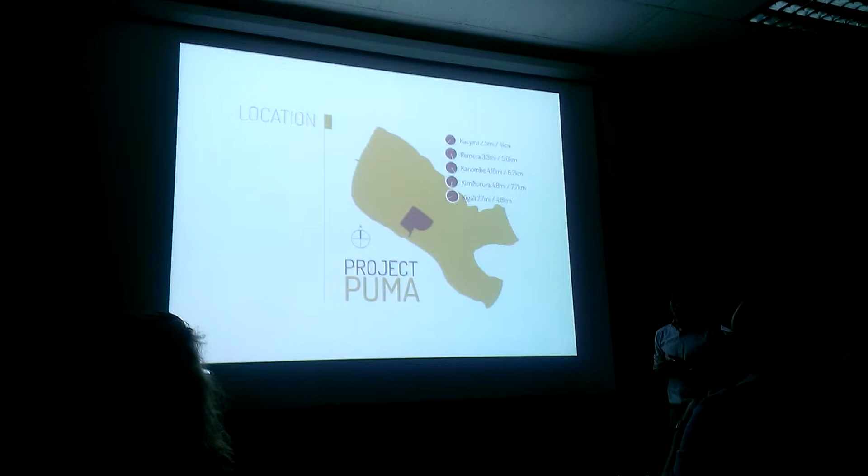They are all walkable distances, 4.8 to the capital—I think I mixed up miles and kilometers there—but they are all very walkable distances, not very far from the city center. So it's actually a pretty good strategic location for a project like this to take place.

Okay, so to our concept, we are focusing on three major themes: the first being movement of the people, the second being economic sustenance, and the third being faith. All these three themes aim to promote human flourishing in Rwanda.

And because of its history, Rwanda is actually one of the top innovators in agricultural production. One other thing we observed is that our site is currently farmland, so if we build on the site we are basically eliminating a lot of farmland. So we had to think about how to keep farmland as the main agricultural system.

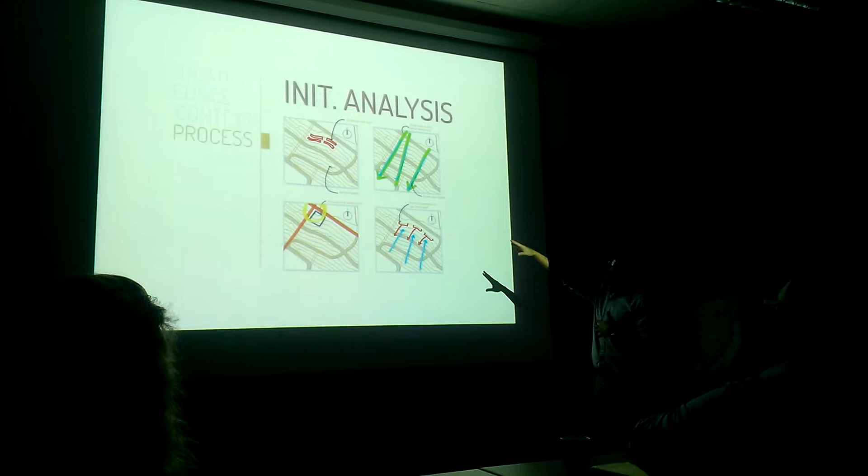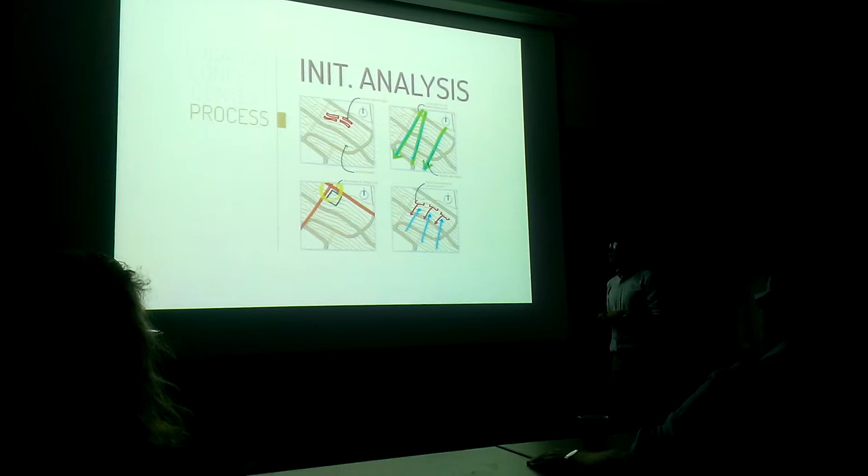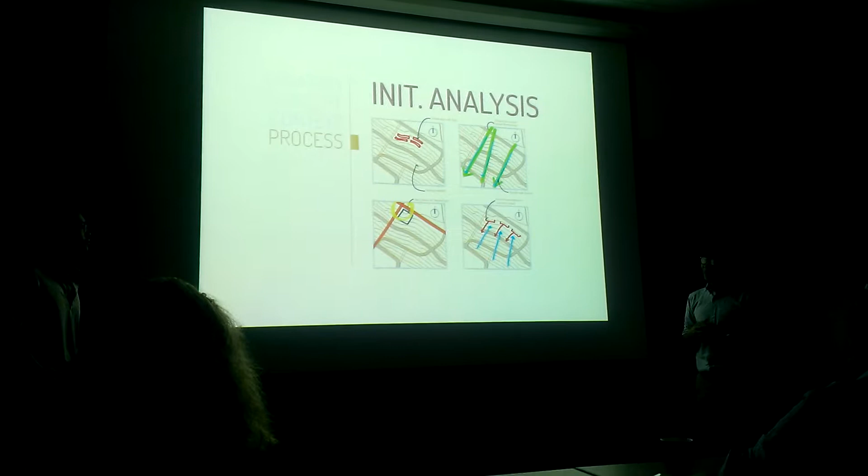So for the site, we analyzed it. The font is terribly small, but we looked at the topography, top left. We looked at how it slopes downhill on the top right diagram, and how people are constantly moving downwards. We also looked at the intersection of major roads, shown by the bottom left diagram, and thought about possibly locating a transportation hub to connect the entire Kinyinya community. We also looked at how the slope runs downwards and how views will be aimed away from the hill and towards the bottom of the hill.

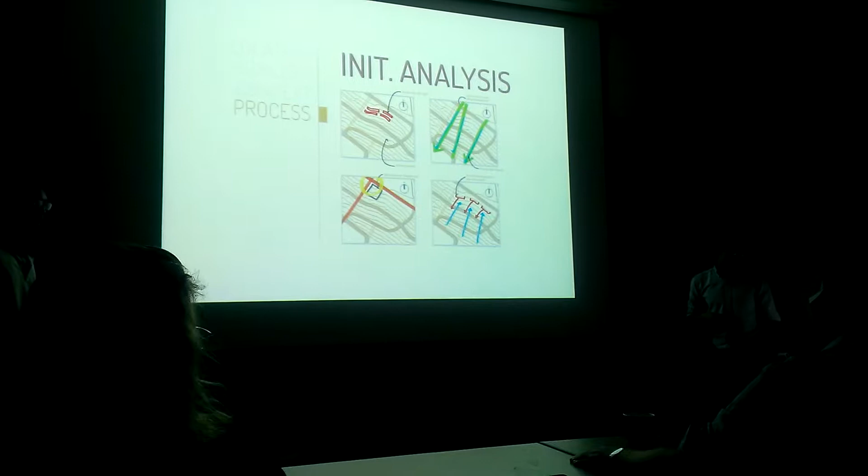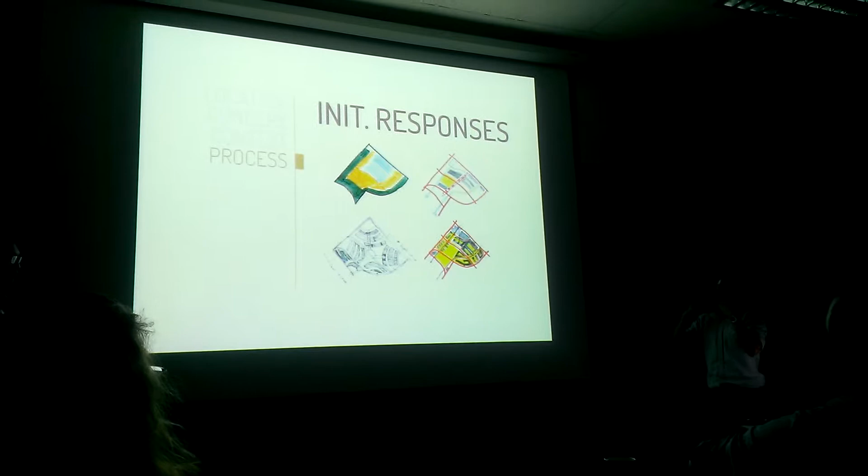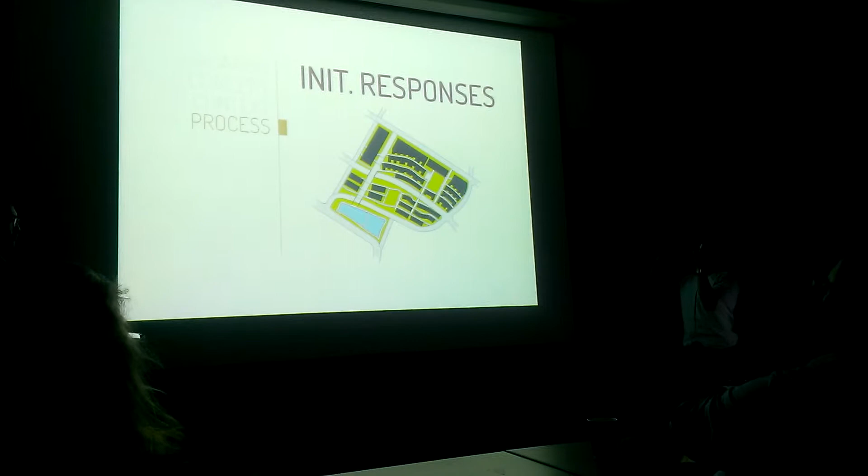So with that, we came up with some responses. Like the first top left diagram, we thought a lot about zoning and how we arrange the masses. Because of the view downwards, we wanted all of our buildings to face the bottom of the hill. That was our initial response, where all the buildings faced downhill and general movement of the site was very left to right, rather than top to bottom.

Then Derek will take it from now.

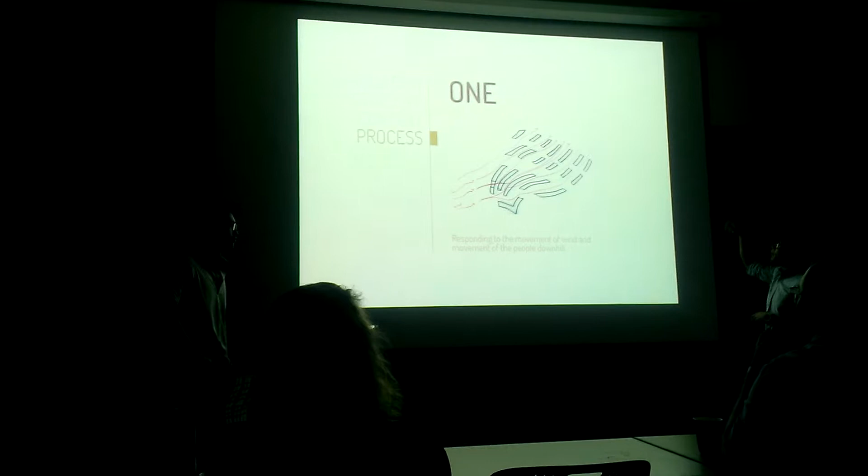Moving on, from the additional analysis we did about movement, we developed the plan further from there, and disregarded a bit more of the initial plan. We wanted to respond to the movement of people downhill and the movement of the wind through the site. The wind comes from the northwest, or actually from the northeast — either way, it still works and the wind still flows through the site.

This helped, and as we continued the movement of the masses towards the bottom of the hill, the central location in the site, we extended the masses to even bridge over the roads, to create an even more fluid flow of mass.

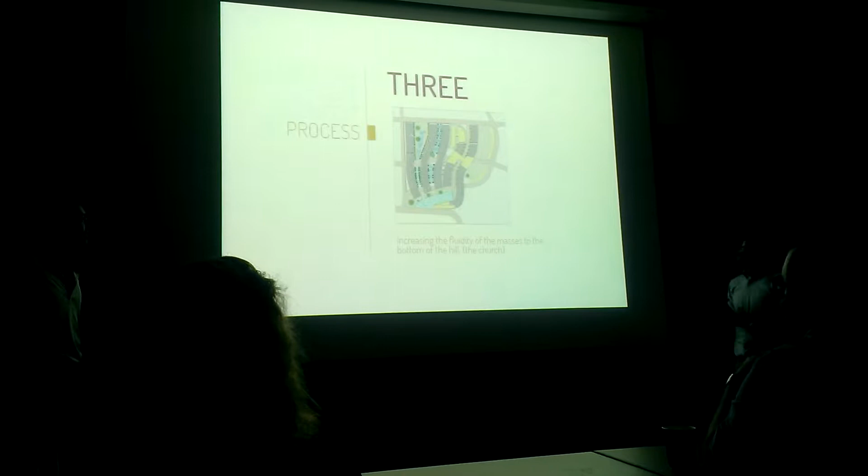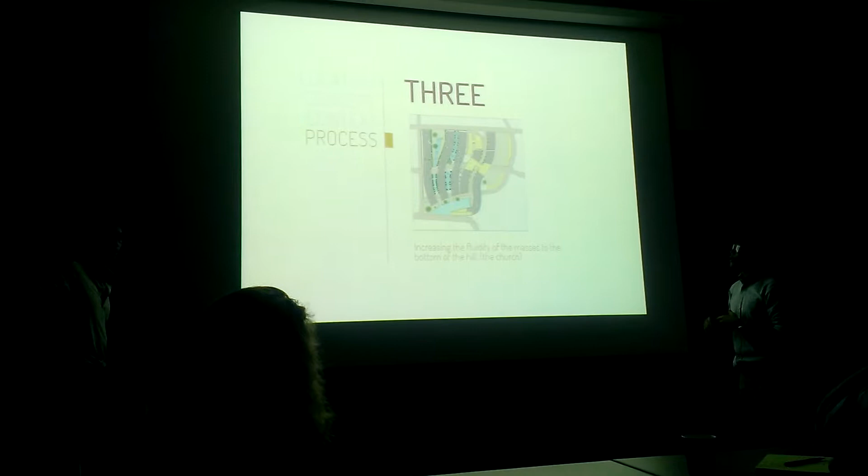And we finally reached our final master plan, which is very fluid and moves people toward the bottom of the site where the church is, and that is the center of our community. So as you can see, this is our solution.

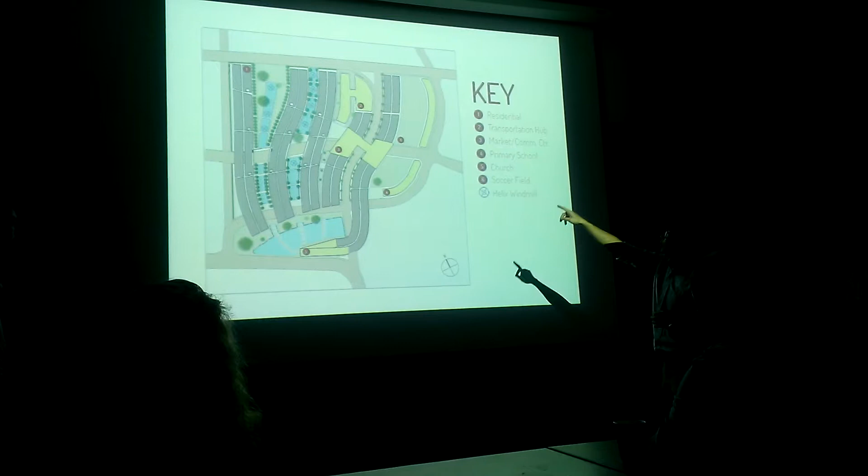The programmatic elements are listed on the right. As you can see, a lot of the residential buildings are more toward the left, and as we approach the central road, the buildings become mixed use. There are basically businesses downstairs as well as residents living on top, which would allow a lot of convenience.

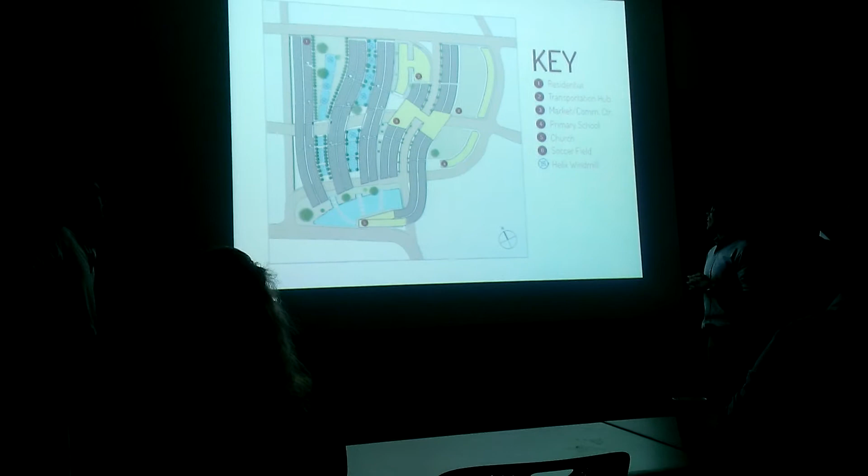We also densely packed all the buildings together. There's a lot of reasons why density should be used, especially for efficiency, and close interactions between people, and things like that.

So, how does our site incorporate movement? I think we need to look at our board... so let me bring it over here. Yeah, I mean, we can show it like this.

First, the design dignifies walking and the use of mass transit, in hopes of reducing the congestion that is currently developing.

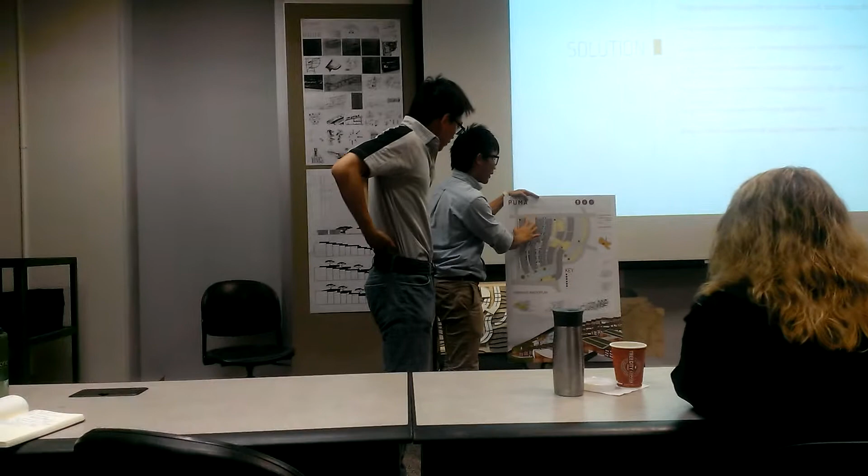We want to dignify walking spaces, and therefore we create very useful walking paths around the site. As you can see, there are back alleys behind the masses, which will be convenient for delivery services and those kinds of services to happen without being mixed in with the walkers.

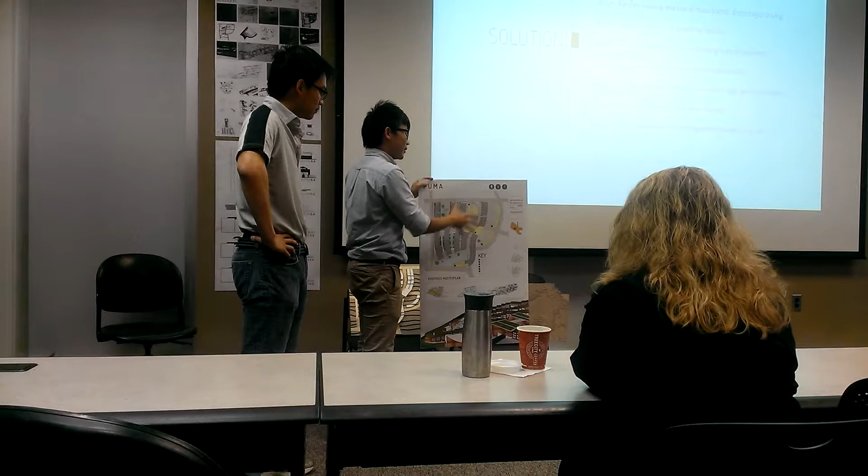The design unifies the movement of people across the site. As we saw previously, before any massing was introduced, the movement was very cluttered and unorganized. But because of the arrangement of the masses, the movement of people is very systematic and organized, with a certain path of movement that we want people to take.

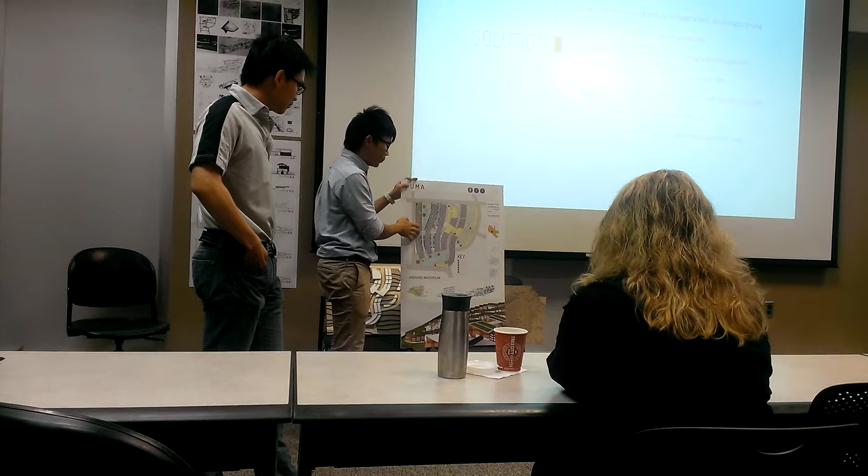The design increases the number of moments along the lines of movement. As people move down the site, they will be able to engage in various experiences, be it small pocket spaces between the buildings, interactions with people and shop owners along the site, or sky gardens on the rooftops of the buildings, as you can see.

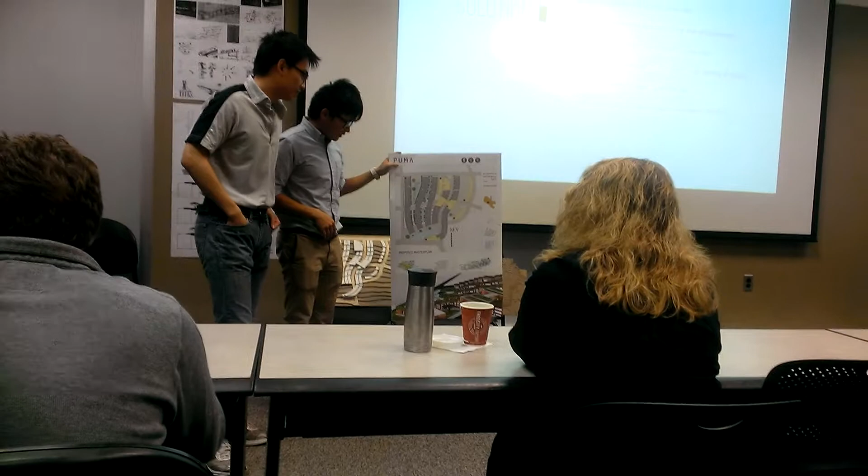We need to talk more about farming. The farming is actually introduced inside the unit. However, we're still in a developmental stage, so we didn't put too much emphasis on that. Basically, what we want to do is reintroduce community or personal farming inside each unit.

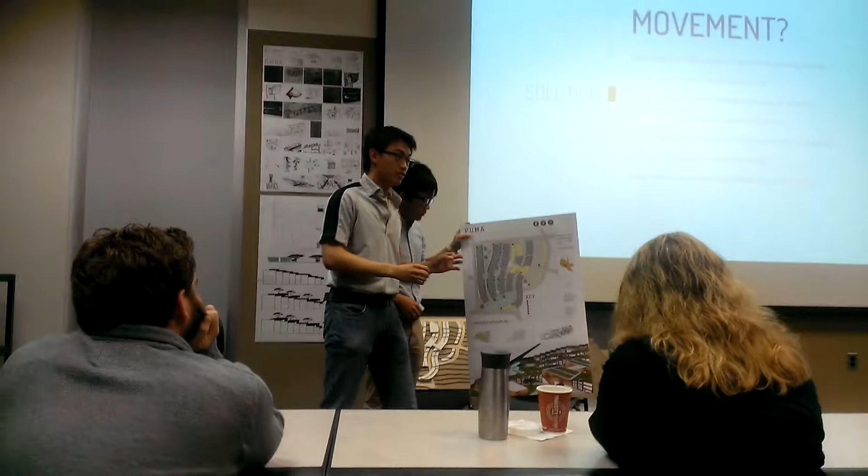As you can see over here, there will be rooftop gardens introduced where owners can actually plant their own plants so they can be sustainable.

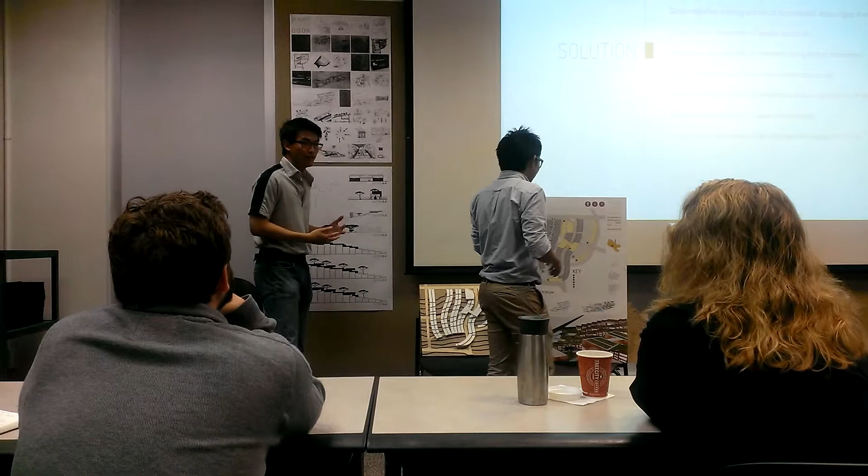We have our developmental stage over here showing what we thought sustainable farming could be. These are in the means of maybe a physical rotational device that can be placed somewhere, which rotates each plant according to how much water or light they need.

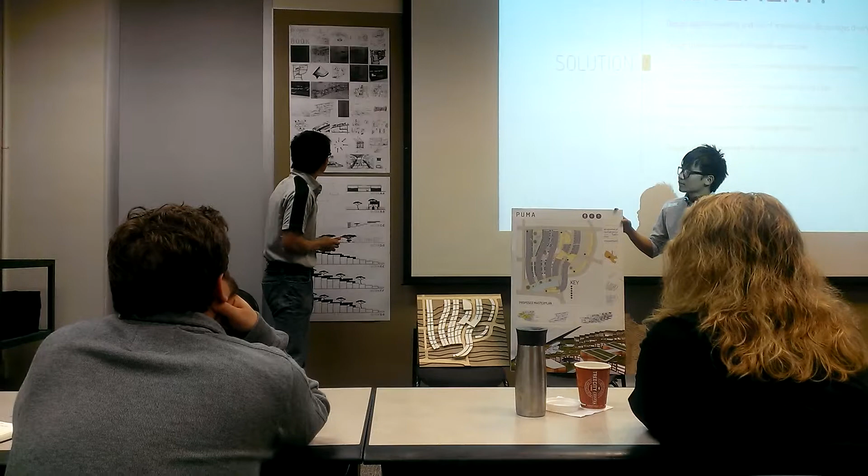We also thought of how these could be mixed in with vertical farming. So we are in the process of experimenting with how light could go down into the space to provide adequate lighting to each of these plants.

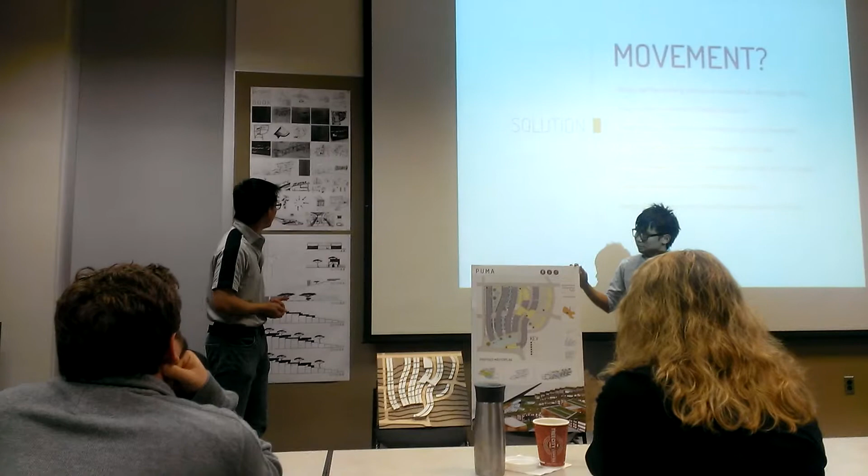These are basically our early stages of experiments. We are still in a very developmental phase of farming because we plan to use farming on a very individual unit-based level rather than on a large scale. It's a bit more difficult to see, because we actually thought about farming as we developed the master plan.

Just a bit more about movement before we move on. The movement of wind along the site, due to the wind tunnels, will increase wind speed and hopefully be sufficient to generate wind energy for individual units.

Because we want to use so little power, just a little bit of wind energy might be sufficient to generate power for the houses. We actually initially thought about even hydropower, since water flows down the site, but our calculations showed it wouldn't suffice for hydropower.

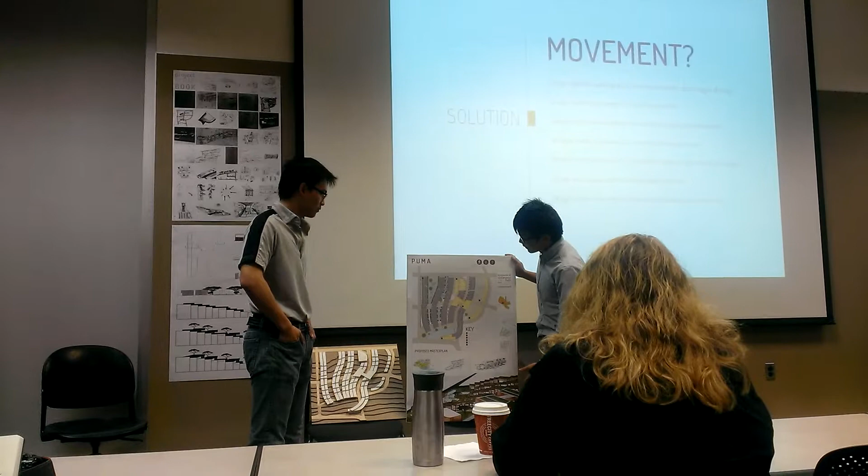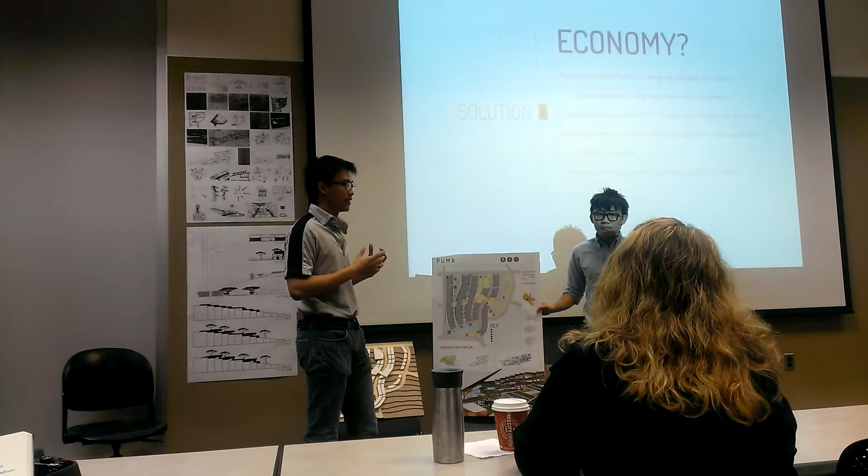Do you want to move to the next slide? Okay, so I kind of explained this a little bit before, but basically the individual plants in this housing will provide self-sustaining communities.

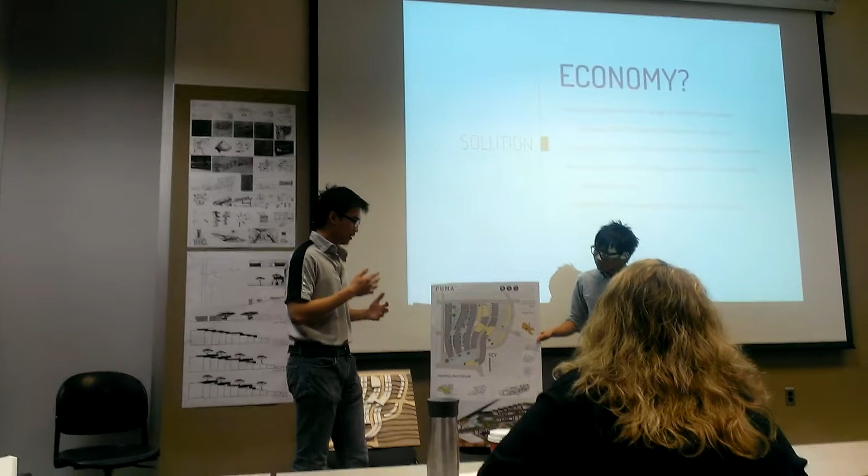These residents could probably get some kind of market out of these vegetation or vegetables as they plant, and also on a spiritual side, it's basically a good environment and good air, because if you have vegetation inside these houses, it would bring good air for the residents to breathe each morning when they wake up.

So yes, it's kind of trying to facilitate this idea of improving life, and yeah.

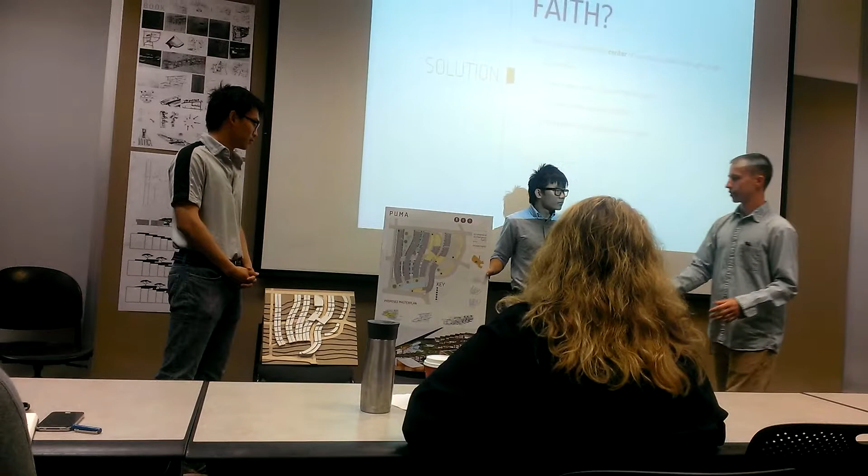And then to answer the question of why we centered a lot of our project around meeting the church at the bottom, with everything pointing to the church in a sense.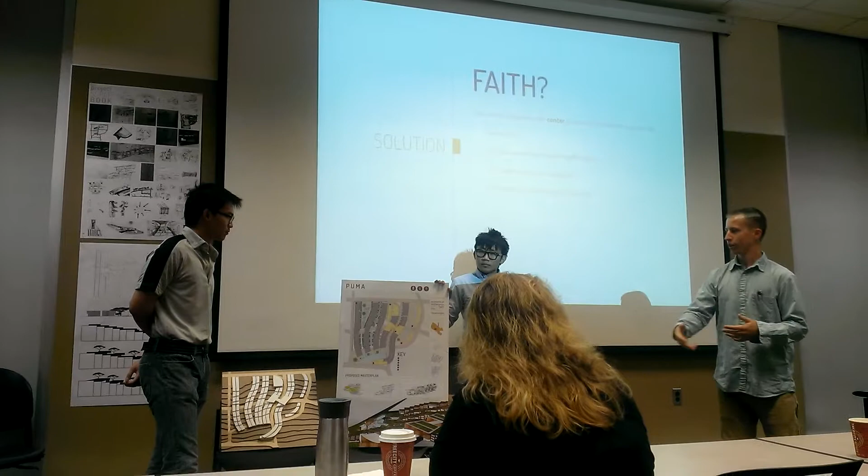One of our biggest goals in this project was to create community, getting people to interact across high and low income groups. We saw the church as a link to create a deeper sense of community in this area, potentially in the best way, for multiple reasons.

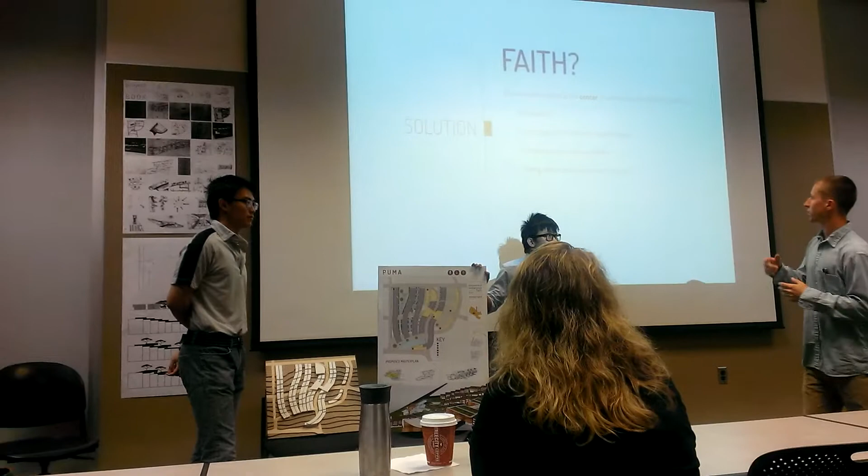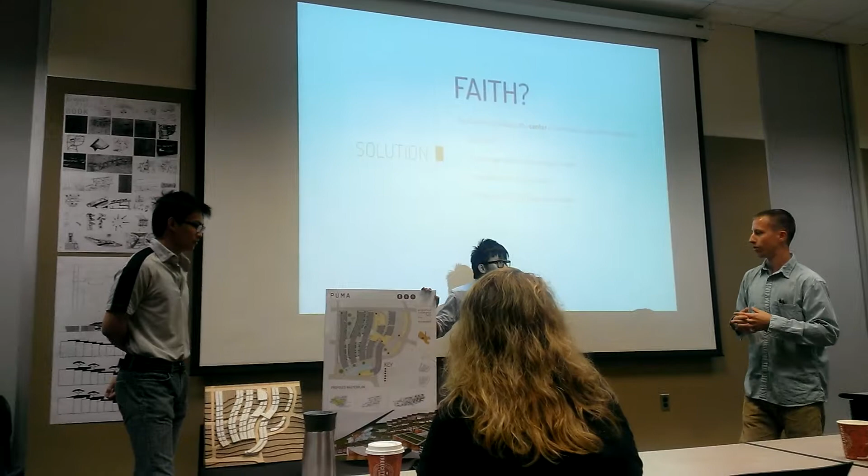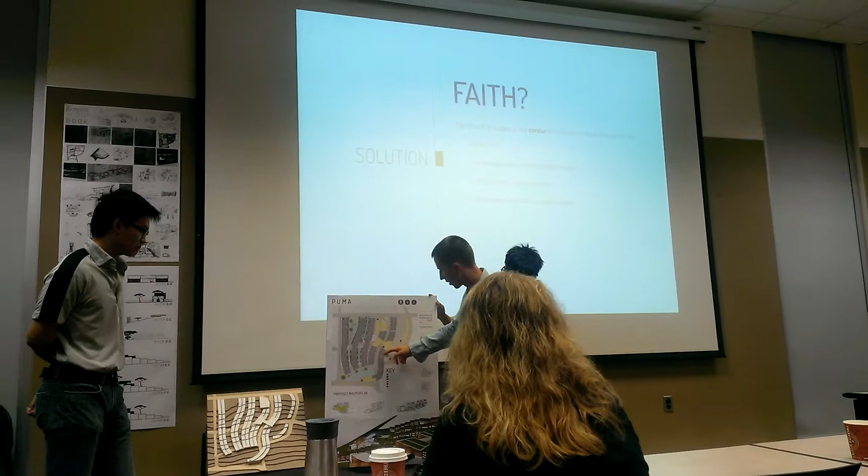So we set to it through community, bringing it to community, and also providing better social conditions, which lends to this theme of forgiveness. By having some sort of linking, these are housing units, not just regular low or high income housing units, but maybe even free refugee housing units directly connected to the church.

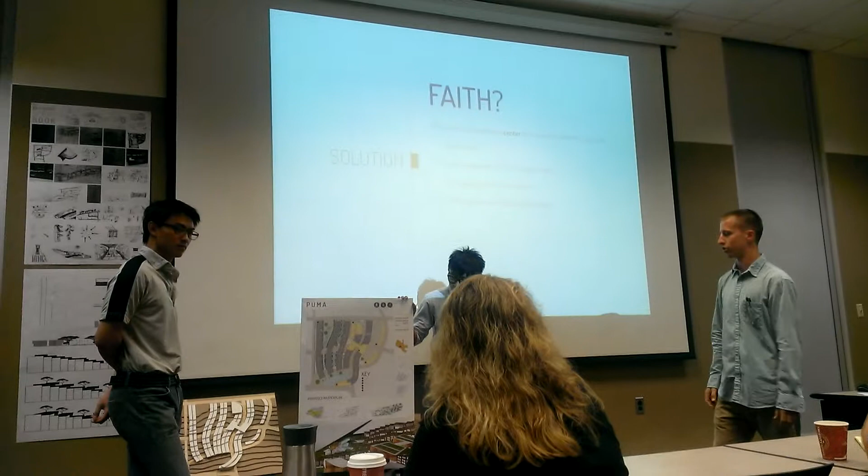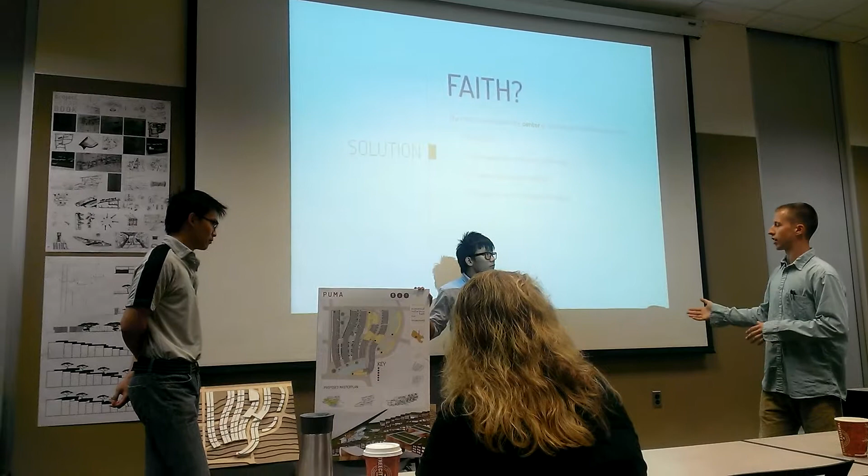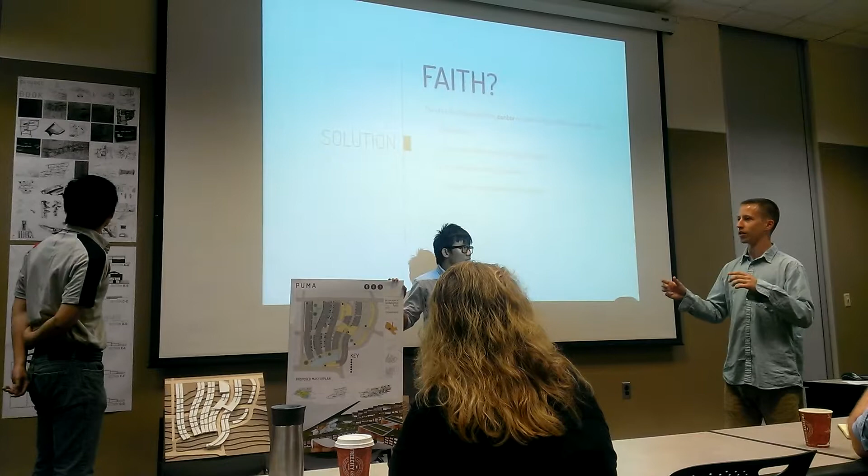That would be one way of showing through the church, through this direct connection, that they want to help with what happened 20 years ago, as well as connecting it to the health clinics we're going to have, connected to the church, showing that the church wants to be involved in the community and society in a positive physical way, as well as spiritual—a deeper sense of community, especially in such a Christian populated area and country, that goes beyond just having nice buildings, which as architects we love to have.

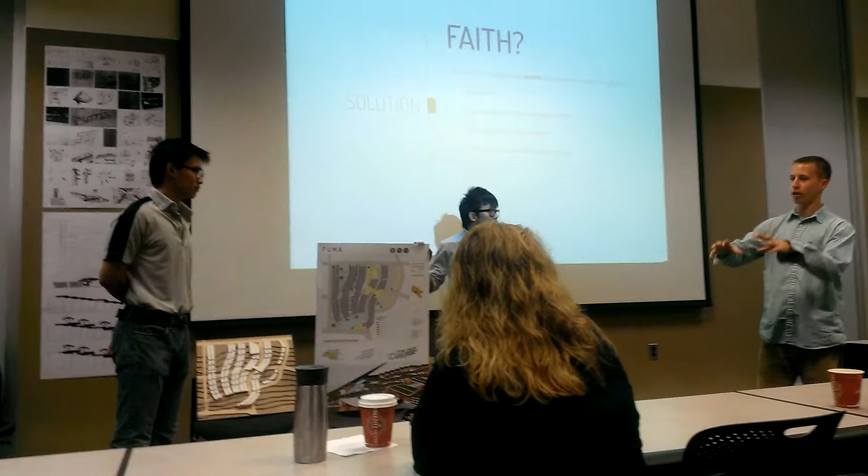There is a certain sense of joy and pride in that, but maybe even more so in having this church, which is more than a nice building, but also provides this sense of spiritual connectedness and togetherness.

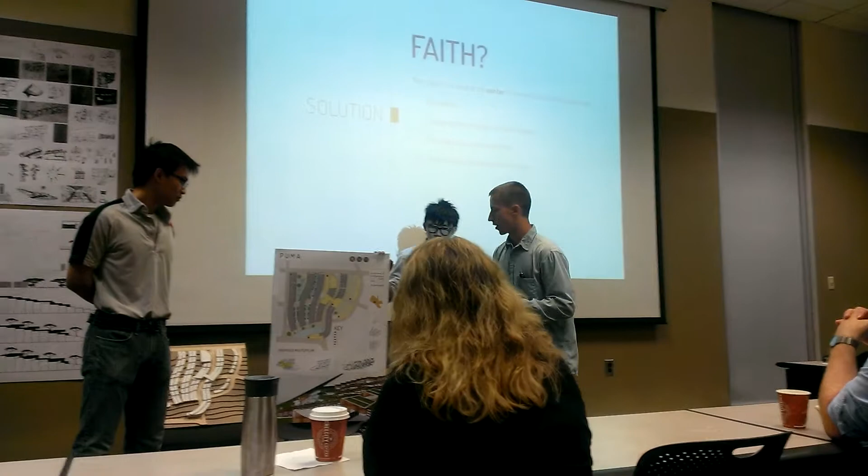The whole master plan lends itself to this idea through the directions of the buildings and the flow, and especially through the water element gathering at the bottom, a kind of metaphorical idea.

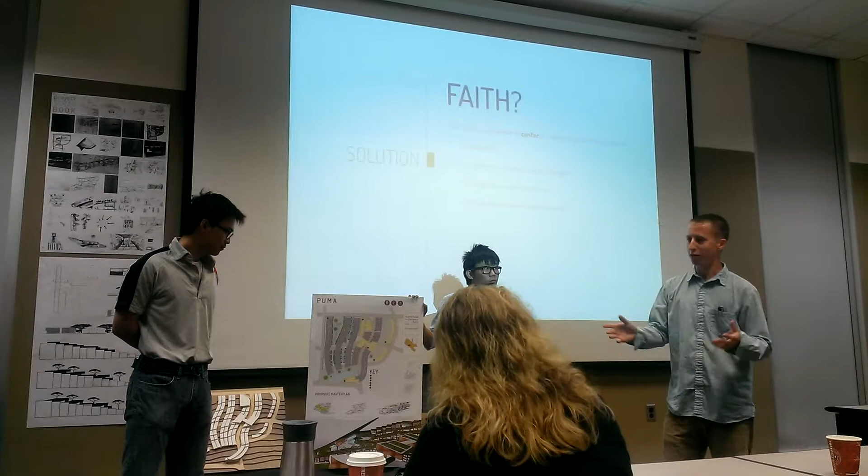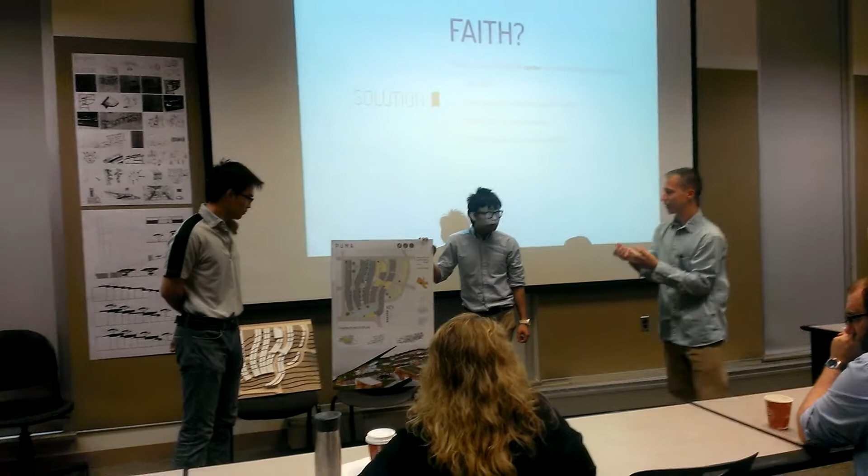I'll steal a professor's idea on this because it's good: when Jesus first started talking to his future disciples, he called them to be fishers of men because they were fishermen. So this idea that all this water is gathering at the bottom and collecting all these people is like Jesus collecting his people to be fishermen. The church is collecting people both physically and spiritually.

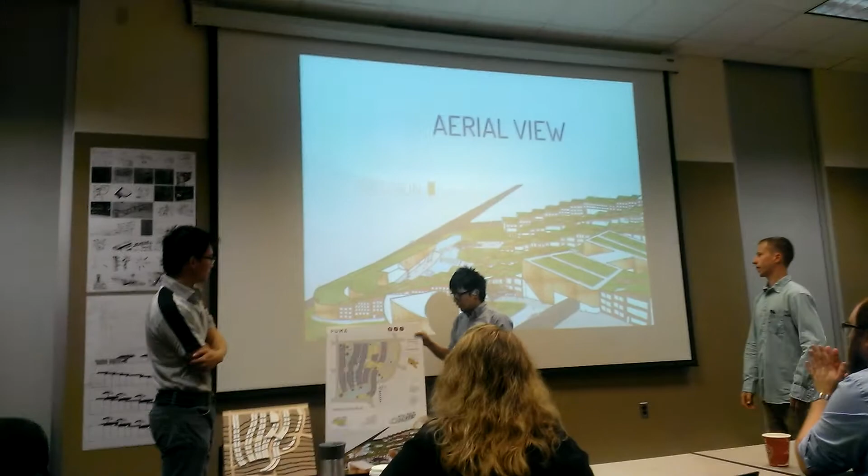The last few images are just renderings of the site. This is the view from the church looking uphill. And the last section would probably be the street—you can see how the water feature becomes a main connecting element of the street, creating a very nice type of environment.

Yeah, so thank you, this is our design thus far.

Before you leave off, could you show the overall site model and talk about what the lowlands are and a little bit about the circulation? It doesn't show very much up there—what is the issue with the lower areas? The lower areas, the valley, the lowlands. Yeah, that's the answer.

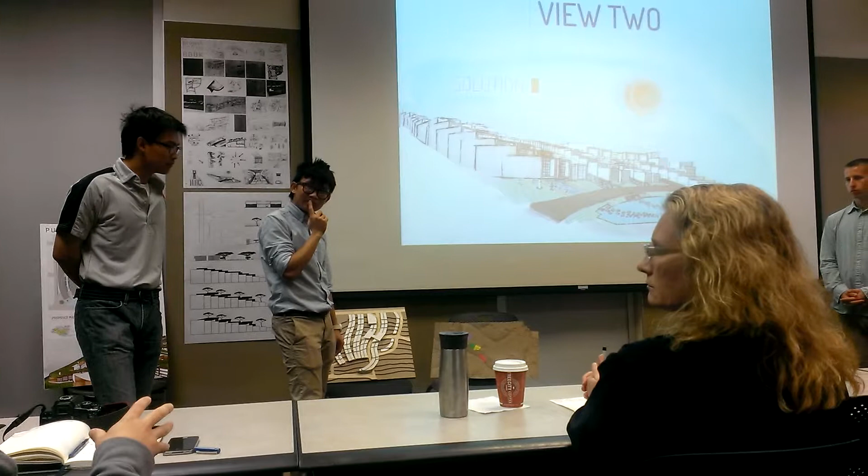So as you can see, it's a steep site. Kigali, the term comes from the French—it's a city of a thousand hills, basically. So you can see hill after hill after hill, and it would have been nice to see an aerial photo in the presentation. But basically this is one hill among many, and the transition between all of them has to do with connections. Between every single hill there's a valley floor that's preserved wetland.

So 20%, or maybe 50%, of Kigali is pretty much reserved for either wetland or areas where the slope is more than 20%. So a lot of Kigali is unbuildable, and that's why there's a big push on this site, which is buildable, for a more dense model than what you'd normally see in Kigali—on this hill, for instance, they'd probably just develop it as sprawling suburban homes. But these guys have made a big push for density here because they have the site for it.

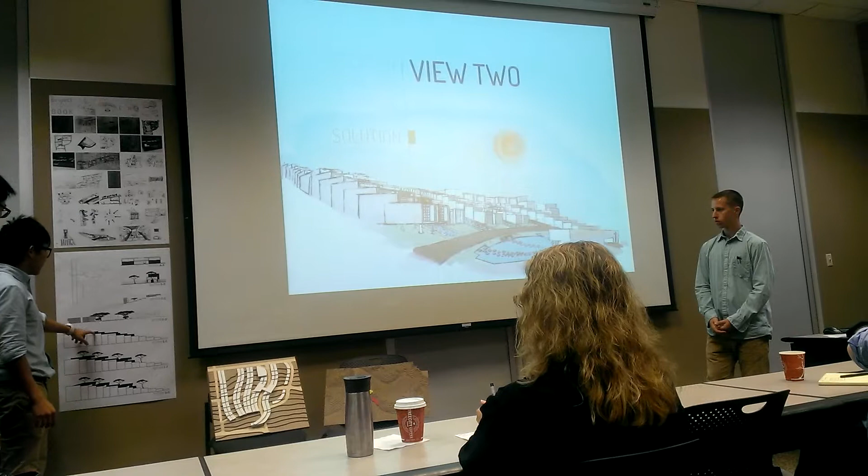As you can see, the site's actually pretty steep—if you look at the sections, it's very steep. One of these declines is actually 5 meters high, which is 15 feet.

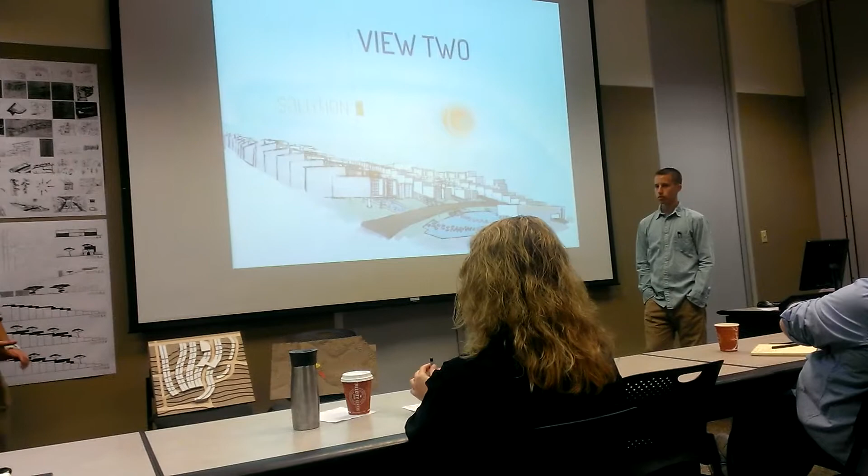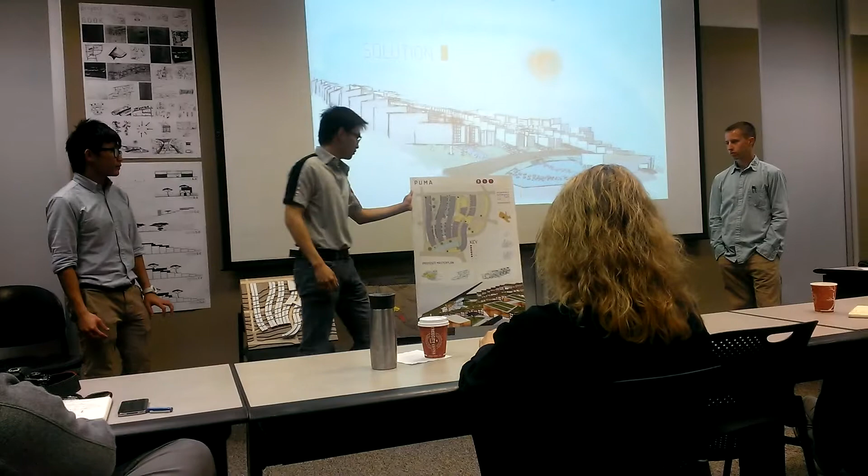Any questions or critiques? Let's get on—yeah, maybe you bring your board out and talk about the architectural drawings. Basically they're at a spot right now where they've developed their program. They know what they want to do with the site, but this is very early stages of design. So any design ideas or even program ideas are welcome.

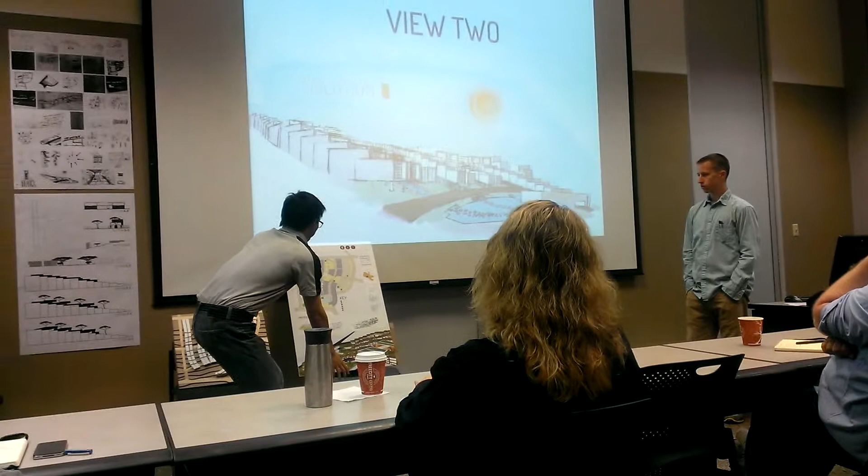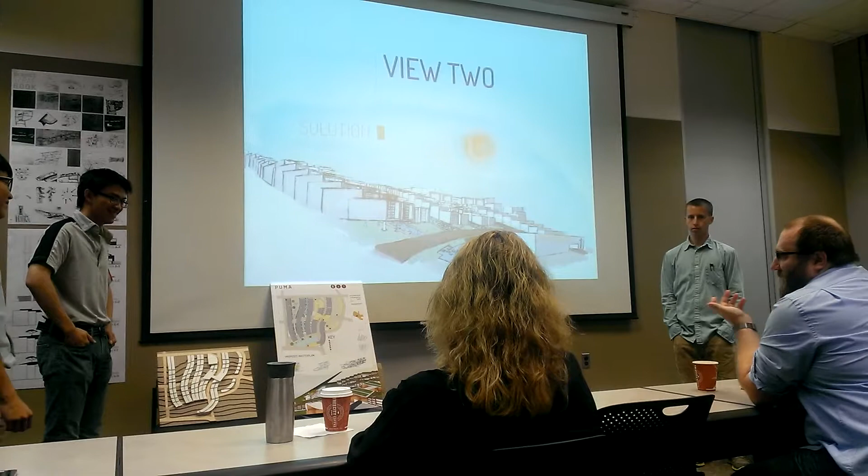I think overall, the way that you approach the site is actually pretty strong. The idea of creating these pedestrian streets that move down the hill makes sense because people like to walk downhill. If you give somebody the choice of an uphill path or a downhill path, they will go downhill, which means that after you come out of the church, you're kind of stuck with that uphill climb. So I don't know metaphorically if there's something about that, but I think the way you're allowing people to matriculate through the site to the bottom is actually really strong.

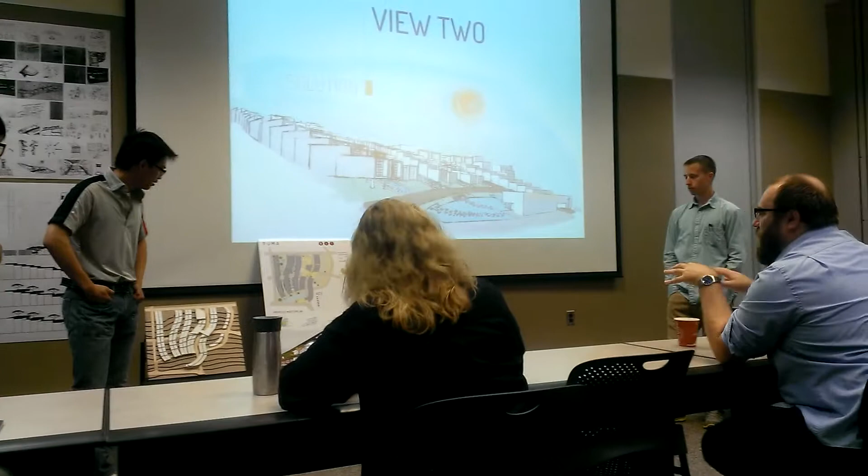That questions at first glance, looking at the diagram, the swaths of water cutting through there, but then the other sketch you had where it was more like these small streams that crenulated through made the scale seem a lot more appropriate. I think that's something that from an urban standpoint doesn't read very well, because I don't have a sense of scale from these drawings.

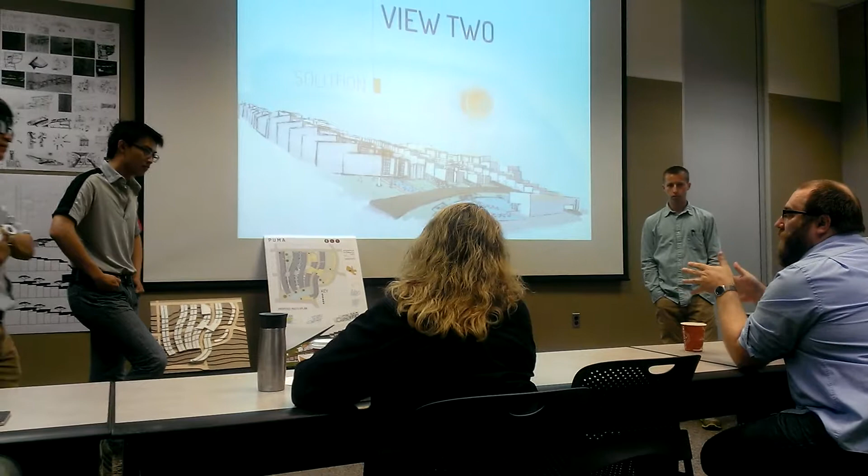The other thing that came up was this idea of economic stratification, where you have the poor people at the top of the hill and the not so poor people at the bottom of the hill. Looking at the architecture as you're presenting it, to me everything looks basically the same. So the question is one of economics: what is the economic driver that makes somebody pay more to live at the bottom of the hill? Is it just proximity to the church? And more importantly, does taking your economic class and stratifying your community based on how much money they have make any historical sense?

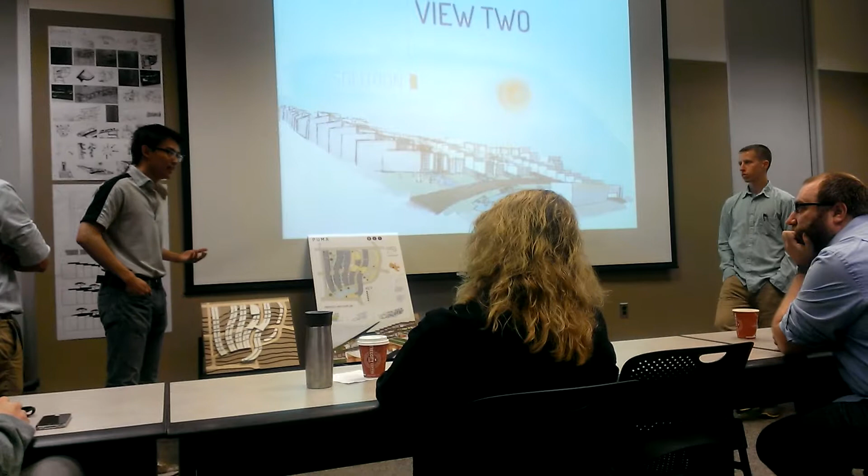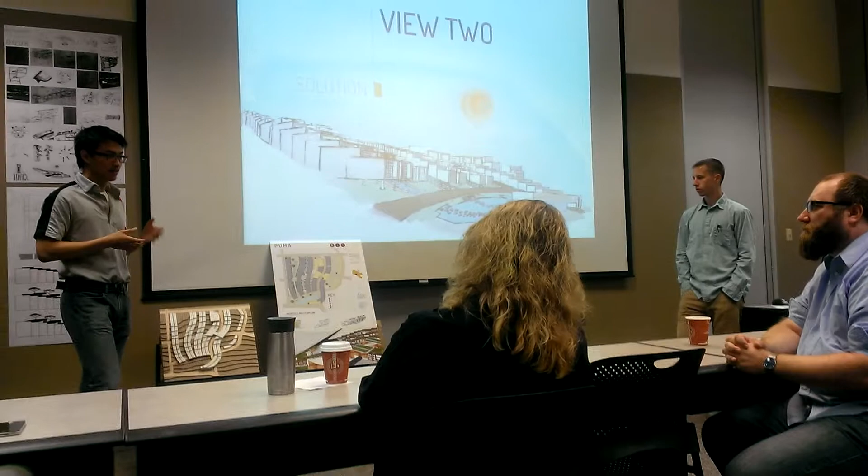It's hard not mentioning it a little bit more, but we actually developed to a point that we didn't separate it. We kind of cooperated. I'm very sorry, but we had a lot of things we wanted to put in, but we didn't want to drag on any more time. So we actually put the lower income and higher income together in one 2-level unit. The person who has middle income, I guess, gets more amenities, and then the lower income gets the basic necessity from the unit. So smaller floor space and things like that.

Yeah, you certainly don't want to segregate. Yeah, that was sort of the initial idea, but then we kind of changed it. Okay.

I think there's a lot of really nice nuance to this that you didn't get a chance to touch on. The play fields, the soccer fields and stuff off to the side is an interesting aspect, and it's bordered by that school, so there's that green space of the school.

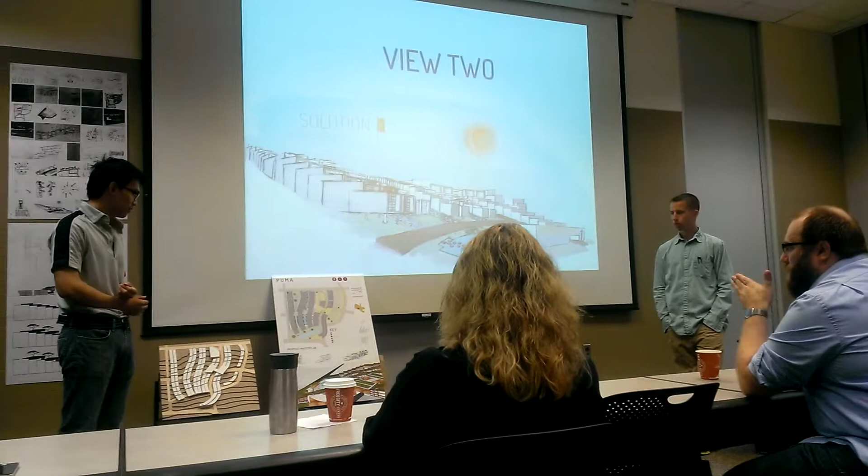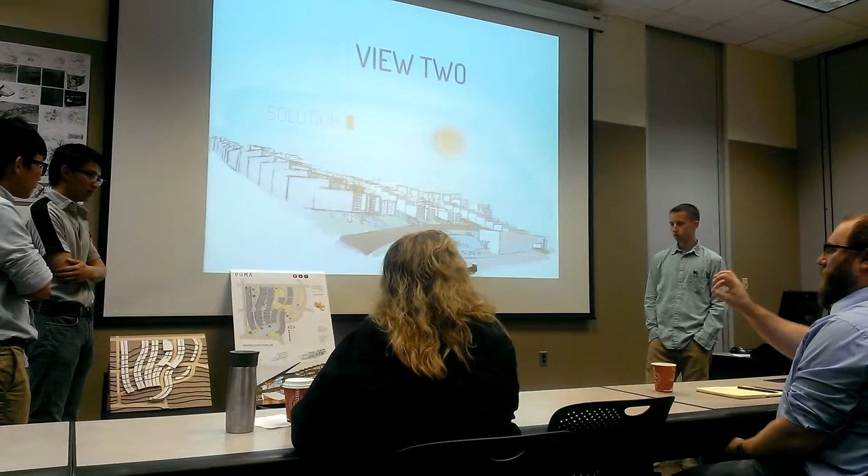I guess when I think about urban planning or city development or neighborhood development, I think about the things that are the focal points of any community. You typically have your religious institution, like the church, which this whole thing is kind of centered on. Then you usually have a school, because a lot of people choose where they live based on the school systems. And then there'll be some sort of commercial spine, which is where you'll get your goods, your food, clothing, et cetera. These become primarily the focal points and public spaces, and they each kind of have their own little public green space or lawn for people to congregate and collect.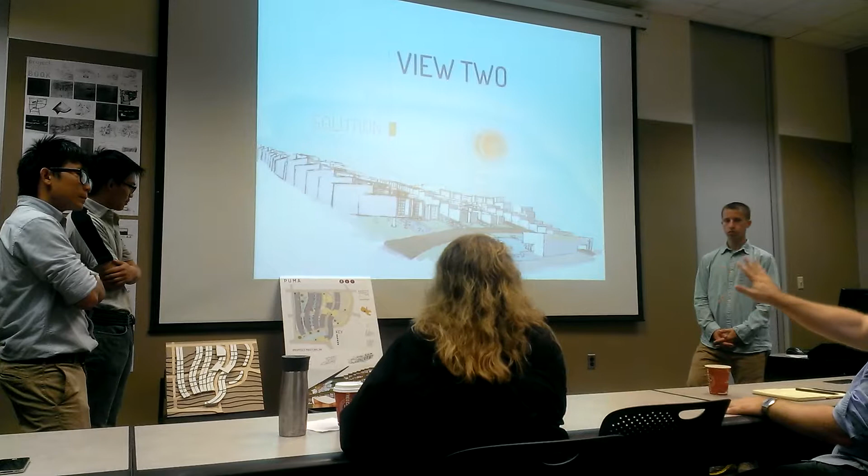So the church is kind of this very formal backdrop to the whole form. We've got this water forescape to it. But then the school, and I don't know if this is just a presentation thing, contextually I'm wondering what's happening to the east or even to the north, because if there's more neighborhood over there, then I think the school becomes like this whole area.

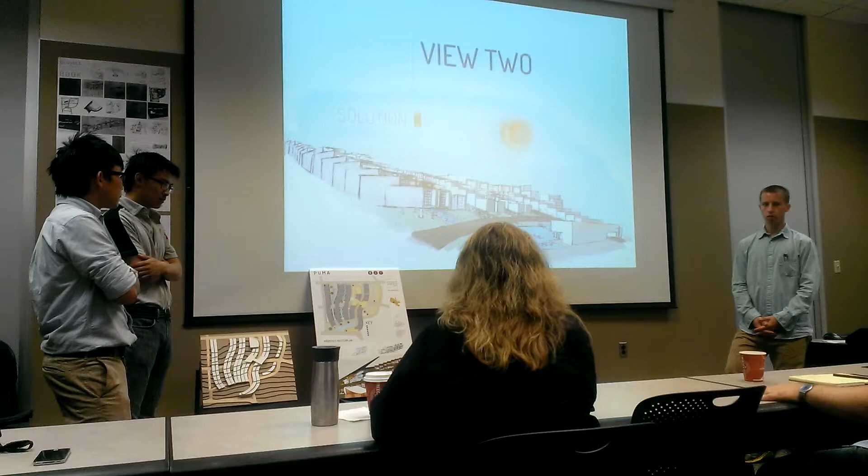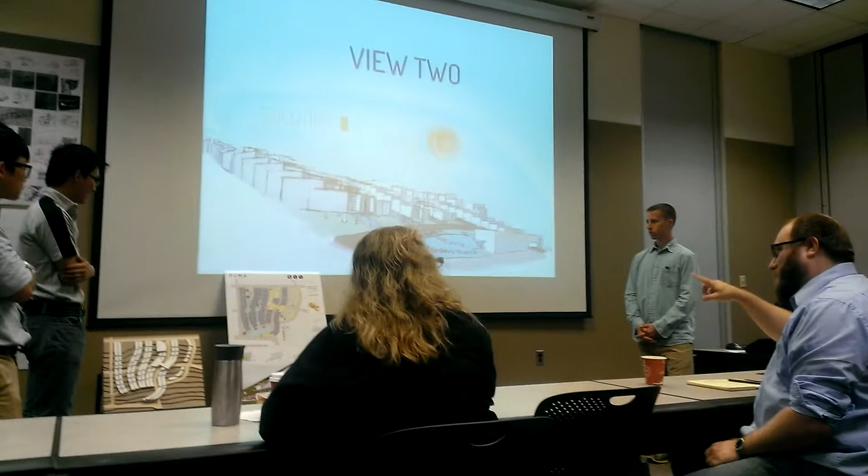And I don't know how big this site is as a whole, it might have been mentioned earlier on. Oh yeah, it's about 350 meters from one corner to the other. So it's pretty big, about 2 miles roughly, huh?

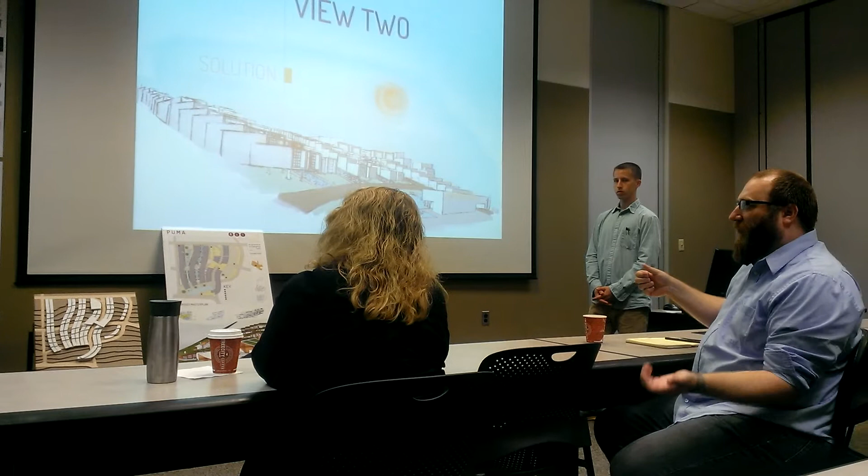No, 5280 feet to a mile. 5,280. It's not... oh.